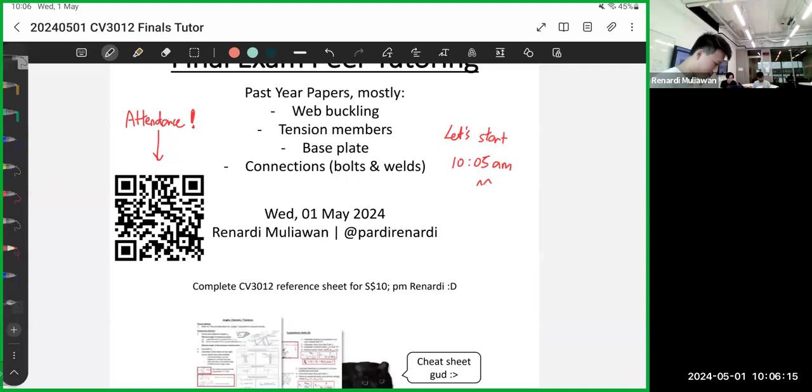Today is the final session of steel, so I'll be covering what we have not covered in the last two sessions: web buckling, tension members, and connections. Base plate, I've heard, is not in sight this year, that's just for info - I'm not sure, that's what people told me. So we'll cover it last if we have time. Let's focus on the three.

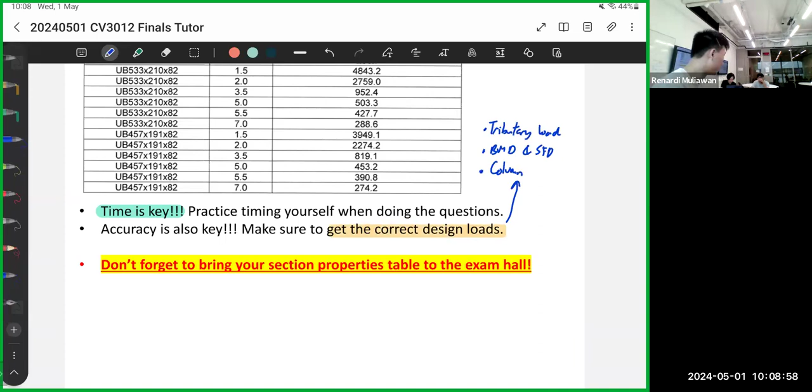Just a bit of recap on quiz two - I think some people made this mistake. Before we start, I'll give a context: for example, you get a moment of 60. Some people divide the 60 into three floors, like 20, 20, 20 - this is wrong. You only divide the 60 between two floors, because the beam is connected to the column above and below only. So if this is 60, 30 will go on the top column, and the bottom column also receives 30. I heard a lot of people divide the 60 by three floors - that's not correct.

So this is under the design loads for the column. Do practice the tributary loading, BMD, SFD, and also the columns.

I'm not sure if this is still applicable for this year because I heard there's a change in prof. Last year they asked us to print the whole section property table, with all the values. I'm not sure if this year they require it, but I prefer to still print it just in case.

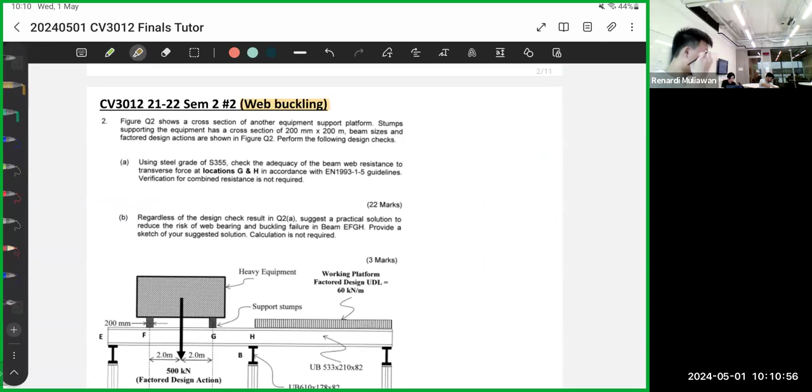For the first question, web buckling - this is what we skipped in the first session because it's not under coverage. For context, this is applicable when there is a concentrated force, a point force. So if you have an I beam, for example, this is your I beam, something like this.

If this is your I-beam, when you put a force on top, like a point force, the web—this middle part—can buckle like this. We consider this a failure. So we need to check for this buckling, to make sure that the beam doesn't buckle when we put some force.

This concentrated or point force can be from the external load, or it can also be from the reaction forces. Both are considered, because technically a reaction force is also a point load, so it's considered under the check.

So here's an example from 2021. Now you have a heavy equipment, and they give you the stumps of the equipment, which is the support, measuring 200 by 200. This one is a typo—it's supposed to be mm. So 200 by 200 means this thing is 200 by 200.

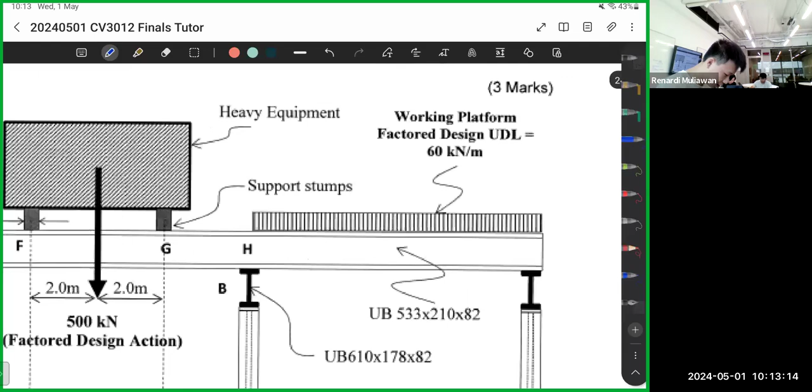So if you see here, at G, the point load comes from the object, from the block, from the heavier equipment. It goes like this. At F there's also a point load, but we only ask to check G. There's also at point H a reaction force going upwards. So these two forces are the ones they ask you to check.

So let's find these two forces first. Your heavy equipment's weight—they give this one already: 500 kilonewtons. It's a factored design action. Keyword here: factored, meaning partial factors have been applied.

Remember, there's the raw loading and there's the processed loading, the one which you have multiplied by the partial factors. If it's factored, it means they have already multiplied for you—you don't need to multiply by 1.35 anymore.

So in this case, we know that FG is just 500 divided by 2, so 250. Because the 500 here is split into 2, right? So F here is 250, and G here is also 250. So we have 250, 250.

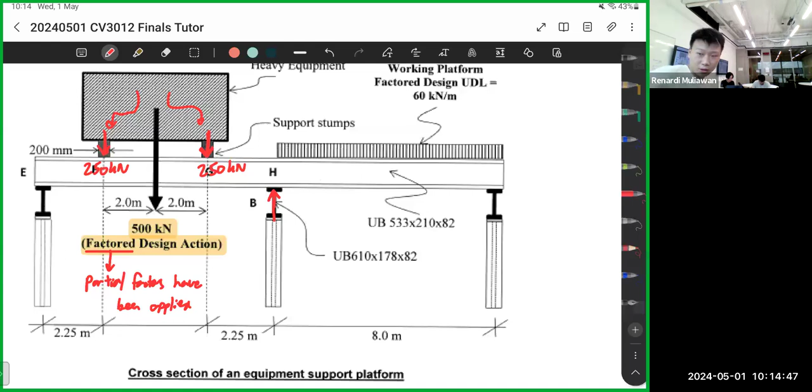Now how about H? If you see here, there are 3 reaction forces—here, here, and here. But usually we assume these two portions are simply supported, so it's easier to analyze. So now assume simply supported.

So therefore FH is 250. Where does that 250 come from? Remember we have 500—this is 500, so this is 250, 250. If you notice, this part of the beam is symmetrical, so 250 here will be carried by FE, and the other 250 will be carried by FH. That's why here is 250. Or you can also just divide the 500 loading by 2, so it's 250.

But if you notice, H also supports this part of the beam—the right side of the beam. So now we have 60 kilonewtons per meter, that's the UDL. This UDL will be split into two as well, into FH and also this part, call it C, for example, so FC.

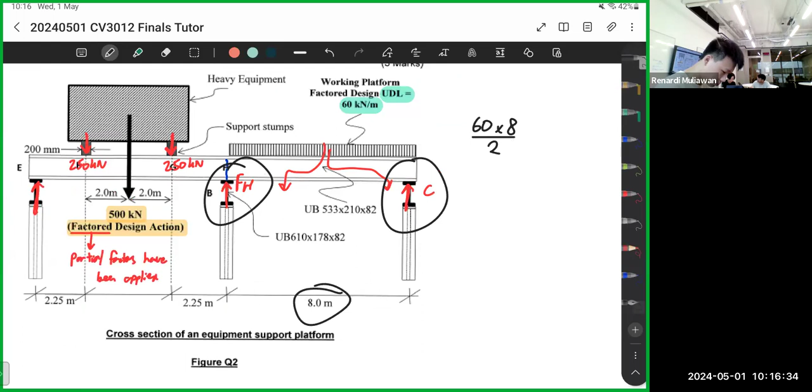So you need to add how much? 60, that's the UDL, multiplied by the length, which is 8, divided by 2, because it's split into C and H. So 60 times 8 divided by 2. Therefore, your FH is 490. So that's your forces.

So now we have FG and FH, right? Then we can do the check. For this check, usually we do it one by one—we do it for one point force first, then the other point force. I'll put something like this. So let's do the check for point G first.

Okay, so for the first step of checking, we need to identify the load type. For web buckling, there are 3 load types: type A, B, and C.

Let's clarify what's type A, B, and C first. Okay, so if this is your beam, this is another beam, this is your beam. This one is in your lecture notes and also in the Eurocode, so you can refer to that. Type A, if this is your force, located in the middle of the beam, that's type A.

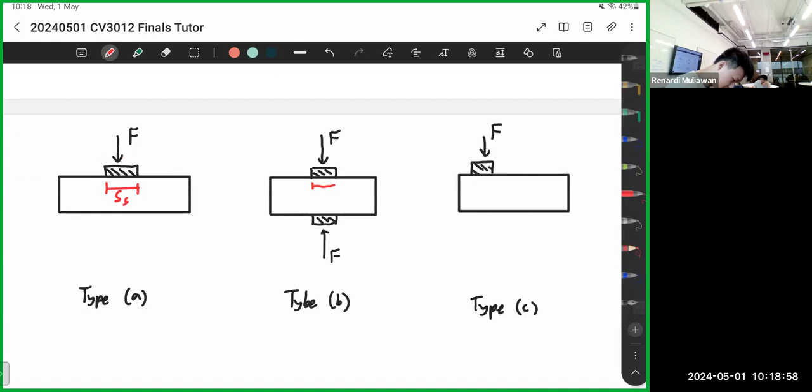Just for info, the force is usually spread on this area. We call this area SS - this one is SS, this one is SS. It's like the bearing location of the force, where the force lies on. Then for type C, we have this also, which is C.

Yeah, so these are just some parameters. This one you can see again in the Eurocode, so you can refer to the Eurocode.

Okay, so if you go back to this example, where's point G? Point G is here, located in the middle of the beam. It's nowhere near the end of the beam, and also it's only one force going down. It's not like if there are 2 forces like this, then it's type B. But since there's only one force from the top like this, we call it type A.

Okay, so like this. This one is FG, so this one is type A. For type A, there's a calculation for KF.

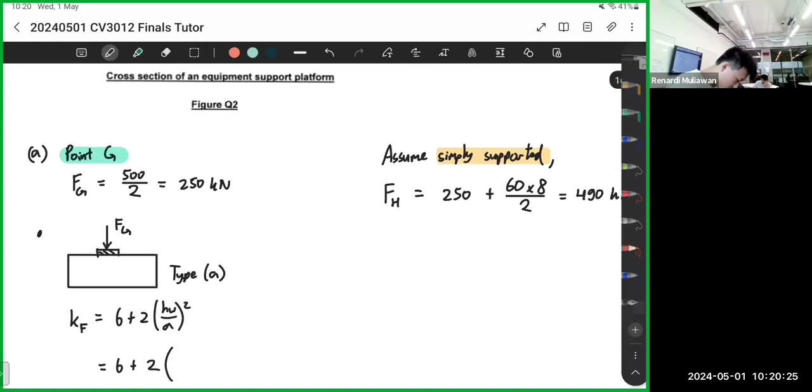KF in this case is 6 plus 2 HW divided by A squared. So in this case, it's 6 plus 2. Then what's HW? We need to refer to the beam first - it's UB 533 210.

Take your section properties table, find universal beam, then go to 533, 210, and 82.

For HW, you can approximate it as H minus 2 times TF, divided by... Just for context, if this is your I-beam, this whole thing is H, this small thing is TF. That's why it's H minus 2TF, so you get your HW.

Okay, so now we have this. A is the distance between stiffeners. So let's go back to this - if you have a stiffener like this, then this is A.

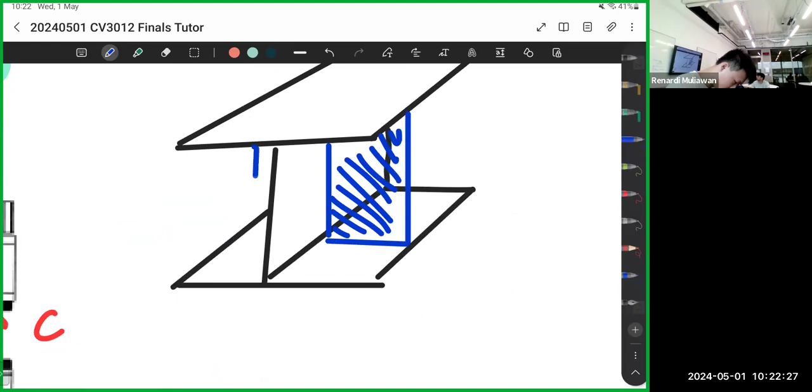They put it like this - they put like a slit there, like a plate in the middle like this. It's to stiffen the web, so that's what a stiffener is. You can see it if you look at a beam in the middle. Later, if you see I-beams in a construction site, you can see those stiffeners.

But anyways, if you see in this image, there are no stiffeners, right? If there are no stiffeners, we put A as infinite. If A is infinite, then this becomes 0, so your KF is just 6. Yeah, okay, that's correct.

So now that's done. Let's go to the next step. So far clear, right? Okay.

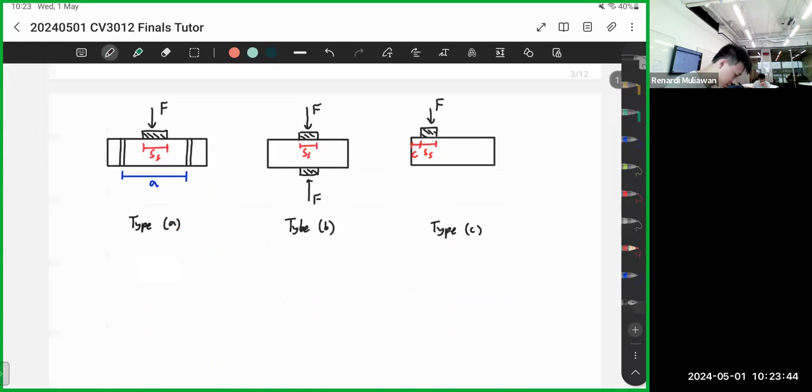Okay, so after finding KF, you can find FCR. This one is just following the steps already. FCR in this case is 0.9 KF times E times TW cube divided by HW.

Again, this one you need your properties table. So KF in this case is 6. E by default is 210,000. This one is in megapascals, so Newton per millimeter squared.

And then your TW here, you need to find it from the table - it's again 533 210 82, which is 9.6. I'm afraid I copied it wrong here. Then HW, as I explained before, is just H minus 2TF, so 528.3 minus 2TF, where TF in this case is 13.2.

Okay, so this one is in newtons, because this one is millimeters cubed divided by millimeters. So if you want to change it to kilonewtons, you just divide this by 1000, then you get kilonewtons.

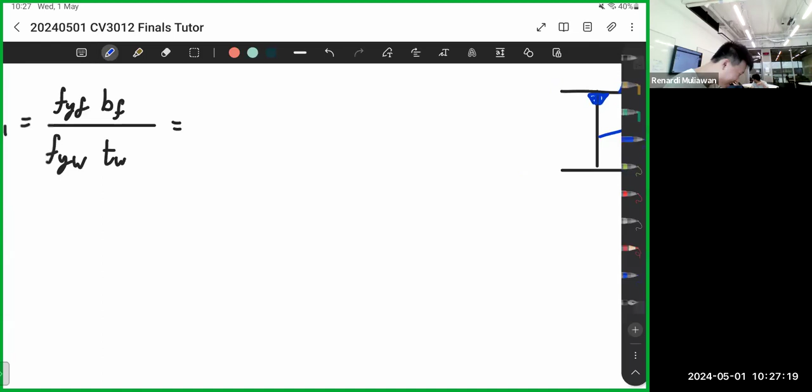Okay, but in this case, right, since the whole beam is, I think S275 - oh sorry, S355. Yeah, the whole beam is S355. So both the flange and the web, they are of grade S355. So this one can cancel out because they are the same grade.

It's for this case, yes, it's usually the same because hot rolled it's one piece. But yeah, this formula is just for the case if you have three different plates, you put it together as one beam, because that's common also.

Okay, but for your case, it's mostly hot rolled, so usually it's the same. Okay, so this one because it's S355, this one is also S355. Okay, so now we just find BF. So BF is your B, that's 208.8

divided by TW. So TW is 9.6. That's your M1. Then M2. M2 is 0.02 HW divided by TF squared. I keep forgetting the square for this stuff for some reason.

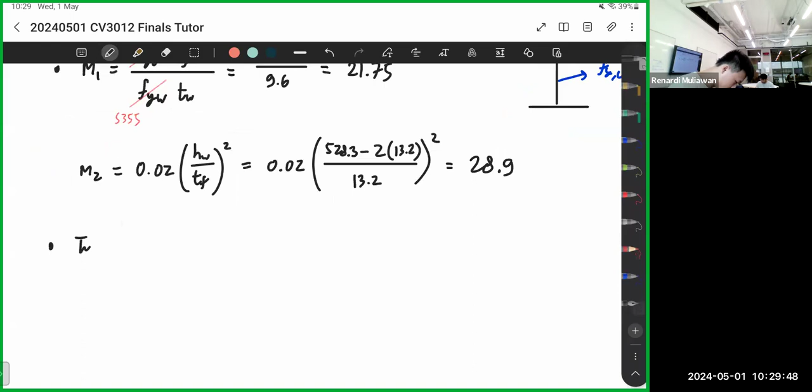And then for type A and B, you follow these steps. So Ly - before that, find Ly. I write here type A and B, right? Because both type A and B, they use these steps. For type C, they have another step.

Okay, for type C, I think you need to calculate LE first. LE equals something, something, something. Then just follow the steps. Okay, but since ours is type A, let's follow these steps.

So Ly is equal to SS plus 2TF. Then you have 1 plus square root of M1 plus M2. Okay, so let's focus on SS first.

So just as I drew just now, SS is the bearing of the force. It's where the force is located. Okay, so for this one, for point G, you need to look at where the force is at. Okay, so if you notice, for the force G, the bearing plate or the bearing surface is this.

Okay, is that surface. Okay, so we know from the info, this one is 200, right? Okay, like this plate is 200, this bearing force, this one from here, 200mm by 200mm. So your SS is 200.

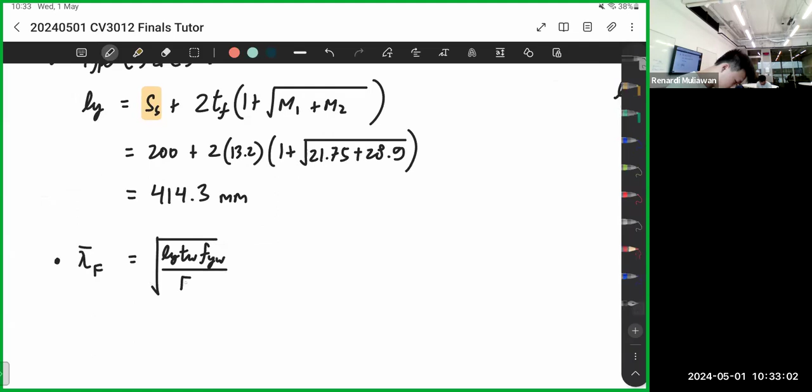So Ly TW FYW divided by FCR. And this should be bigger than 0.5. So Ly in this case is 414.3. TW, I think it's 9 point something. 9.6, yeah, thanks. 9.6.

Then FYW, just now it's grade 355, right? 355 divided by FCR. So FCR in this case was 1999, or 2000. Okay, this one we convert to SI units, so times 10 to the power of 3. Okay, so 414.3. Okay, thanks. 0.84.

Okay, so it's bigger than 0.5, so it's okay. If it's lower than 0.5, use 0.5. Okay, so this is like a minimum value. Okay, so now we have this. Okay, so the rest of the steps is straightforward. We make a new page.

Okay, so after lambda f, you need to find chi f. So chi f is 0.5 divided by lambda f. Okay, so it's just 0.5 divided by 0.84. So in this case, you have 0.595. So this is your reduction factor.

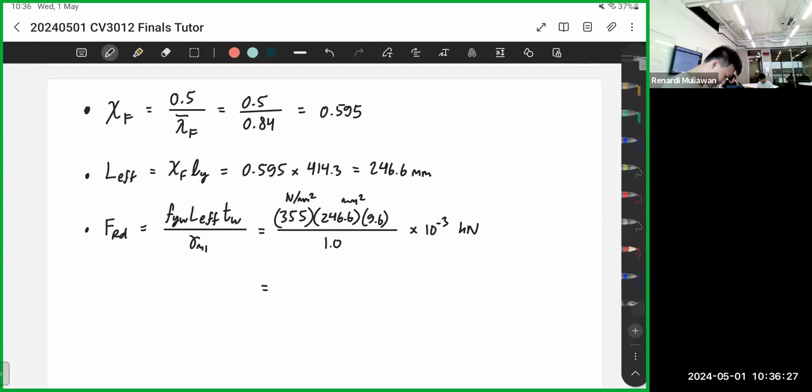FYW is 355, L effective is 246.6, then TW is 9.6, all divided by gamma M1, which is 1. Okay, this one is Newton per millimeter square. This one is millimeter square. So you just times 10 negative 3. You get kilo newtons. So 840.4 kilonewtons. Okay, so now we have this.

Okay, so now we have two checks. Okay, so first thing is eta 2. Okay, eta 2 first. So this one is FED divided by FRD. FED in this case is 250. 250 divided by 840.4. So this case is 0.297. So this one must be less than 1, so it's okay.

Okay, then for the second check, I think it's eta 1. So eta 1 in this case is, oh, this one is in combination for your moment. MED divided by FYW PL divided by gamma M1, gamma M0.

Okay, since this one, right, we don't have time, usually you can stop at this step, okay. But by right, you need to find the moment at that place. So if you have time, find the moment. If you don't have time, just leave it like that. But the final check should be this one: eta 2 plus 0.8 eta 1. So this one should be less than 1.4. So this one is the combined check.

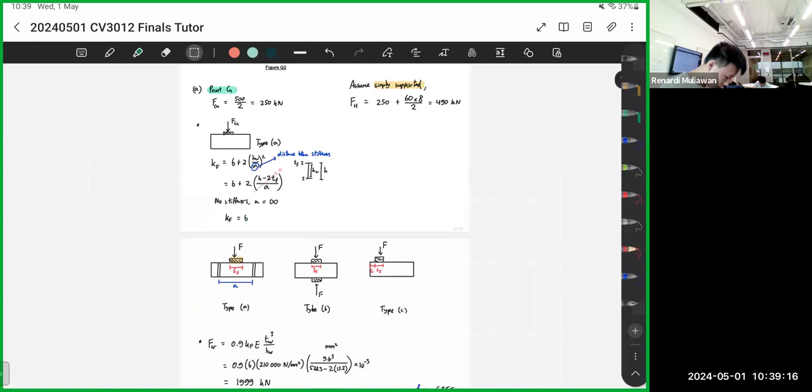So let's go to the second point, which is point H. So for point H, so the steps are exactly the same, right? Let me see. Okay, so if you see point G and point H, both of them are type A because it's in the middle of the beam. Okay, it's nowhere near the end of the beam. Oh wait, let me turn off the notification for this one first.

Okay, now let's continue first. So yeah, so again, FH is located in the middle of the beam, right? So FH is type A. Then for type A, the calculations are the same. So KF is the same for FH. FCR is also the same because there's nothing changing here. M1 and M2 is the same. So everything is the same until this part, the L1.

Okay, so I'll write it down first. Everything the same up to L1. Okay. Did I forget something? I think I forgot something. Ah, yeah, sorry, I forgot something. It's this one. Sorry, I got mistake. Okay, it's a mistake in the explanation. Okay, if this is lower than 0.5, if lambda f is lower than 0.5, you set M2 to be 0, then repeat steps. Yeah, repeat from Ly.

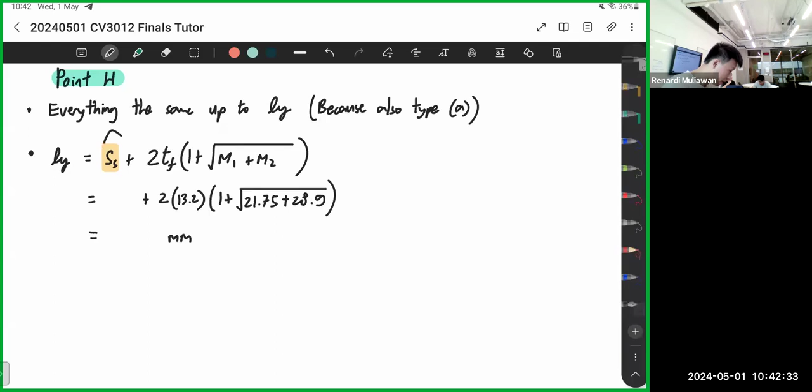Okay, so for Ly, right? TF is the same, M1 is the same, M2 is the same. But what's SS? Remember, SS is your bearing width.

If you go back to the image, FH, the bearing width is this I beam. So for I beams, there are special calculations to calculate the bearing width, like this SS. There's a special calculation for it.

So for this SS, as you can see, the force is transferred from this U beam. So the U beam you calculate for SS is this. Use this for SS. It's not this beam.

This beam is the beam that we're checking. The beam we're checking means all the formulas here - HW, TF, TW - it uses this beam, the beam that we check.

It's only for SS. So only for SS we use this one, the transfer beam. So this one is only for SS, because SS has nothing to do with the beam we're checking. It has to do with the bearing width, that's why we use this one for the SS.

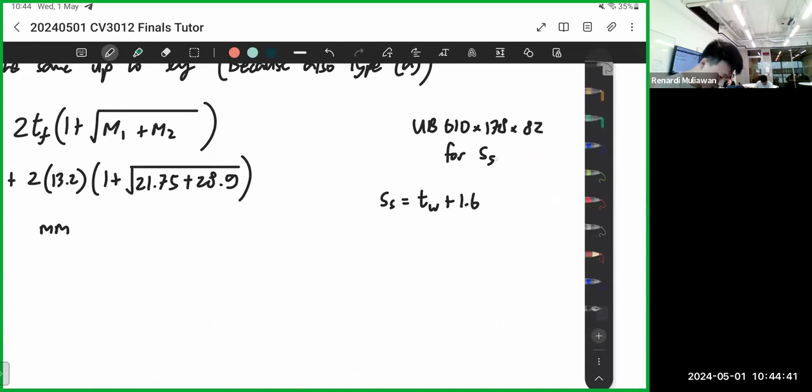So let me type it down. SS in this case uses UB 610 x 178 x 82 for SS. Let me cut and paste. So for an I beam, the SS is TW plus 1.6R plus 2TF.

So this one again, you refer to this beam for SS. So TW in this case, use your table - go to 610, 610 178 82. So TF is 12.8. Sorry, TW is 10. TW is 10 plus 1.6 times R.

So R in this case is 12.7, plus 2 times TF, in this case 12.8. Yeah, this one you can practice looking from the table.

So, what's SS? So 10 plus 1.6 times 12.7, plus 2 times 12.8. In the end, we will get 55.92 millimeters.

So this one just copy paste, put it in SS. So in the end you will get 55.92 plus 2, 13.2, so you have 270.2. Okay, so now you have this.

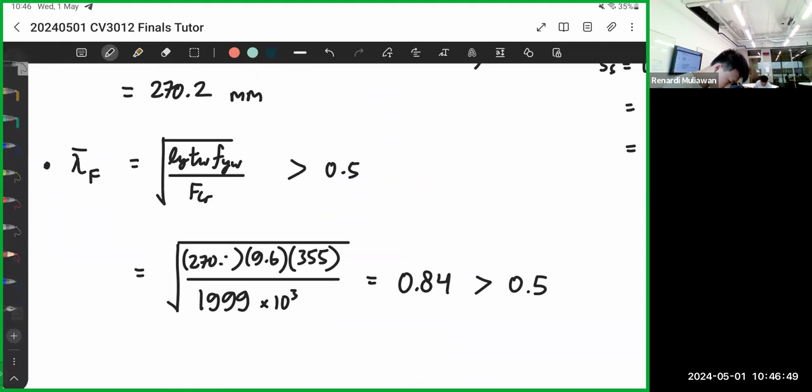Then TW stays, because TW is not this beam, it's the beam that we checked. That's why TW stays. So in this case, we have 270.2 times 9.6 times 355, divided by 1999. We get 0.679. So quite close to 0.5, but still above, so it's okay.

So we continue the next step. Yeah, these steps are the same, but change this one to 0.679. So we use that value for this. And this one changes, LY changes also.

Leff changes, TW stays the same. FRd changes, FPT changes. So just fill in the values. So 0.5 divided by 0.679, we get 0.736. So 0.736 times LY.

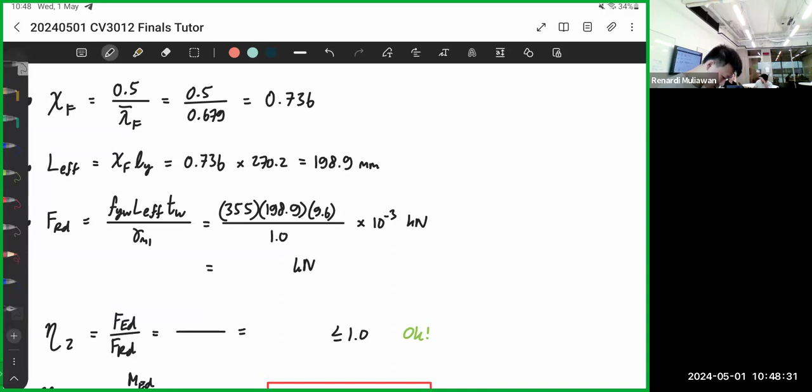Remember LY changes to 270.2. So you get 198.9. So Leff equals 198.9. 355 times 198.9, 9.6 divided by 1000, you will get 677.9.

So 677.9. FED for this case is 490. So 490 divided by that answer, you will get 0.723. So it's lower than 1, it's okay.

Then, as usual, you need to do this check. But we don't know the moment, right? Actually, for this one, we know, because it's at the support, and we assume it's simply supported. So M is 0. So in this case, we know this one is 0, because MED is 0.

So your combined check, in this case, is just 0.723 plus 0.8 times 0, which is just the same, 0.723. This is definitely less than 1.4, so okay, done. Let me move to this.

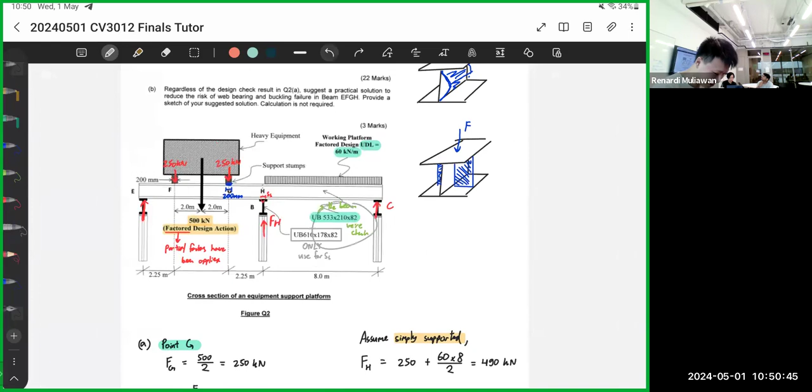And actually that's part B also. So regardless of the design check, suggest a practical solution to reduce the risks of web bearing and buckling. So actually the answer is here, I've drawn it already: add stiffeners, that's it. Add stiffeners.

Because this will stiffen the web so it doesn't buckle as easily. Okay, so this one is part B. Let's label this part B. So done, that's the whole thing. Are there any questions so far for this?

Okay, for the, you can see other examples in the CE Club solution. Yeah, because I think the year after this they have Type C, so you can try Type C as well. Okay, yeah, but the steps are mostly the same. So yeah, it's okay, just they have only like one more step, I think, like to find LE. Yeah, just to find LE. Okay, so that's number 2 of the exam done.

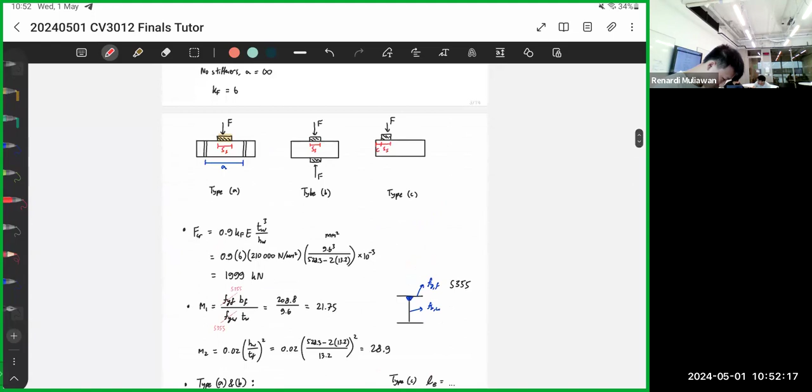Wait, I'm not sure how you determine the cases. Again, case A is for the force which is in the middle of the beam. Then type C is for the force in the end of the beam. Type B is if there are two forces on top and bottom.

Okay, so for this one, again, I'll explain. Type A is located in the middle of the beam, like you see the right and left, right, it's very far from the end. Then you see point H, you see the left and the right, it's also very far from the end. So both of them are type A. It doesn't need to be strictly at the middle, as long as it's relatively far from the end.

Yeah, so I'll just draw examples for type C and type B like this. Okay, so for example, we have something like this. We have this. We have this. I'll give you an example like this, for example.

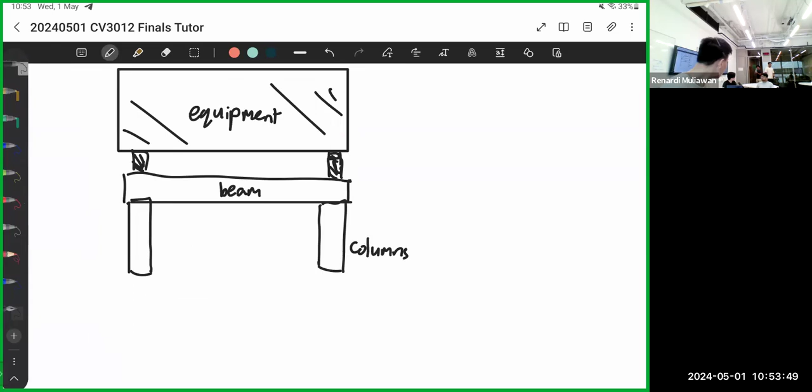Okay, so for this one, right, you can see here, if, for example, this equipment, then this is your beam, then these are your columns. Okay, so if you have something like this, right, there's a force going from the top, from the stump of the equipment. There's also a reaction force going from the bottom. So this is type B. Okay, even though it's located at the edge, right, type B is usually more critical. Okay, so this is type B.

Another example, for example, is if you have something like this, this is your beam. For example, you have some loading here. This is your W, which is a UDL. Then this is your support, for example like this, so this one is column. So this one, you have a reaction here, right? So this is the force. Okay, so this is type C because there's only point force going from one direction. Okay, so this is type C.

So if you notice, this one, the UDL, so this UDL is not considered, it's not considered under the web buckling check. Okay, why is it not considered? Because it's distributed, it's not a concentrated force. Okay, so only concentrated force matters. Okay, I hope this clears up the type A, type B, type C.

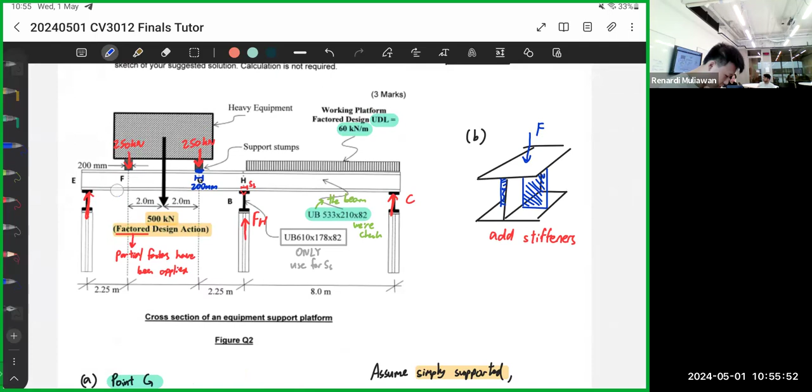Okay, so wait, somebody asked, can you consider F type C? No, F is not type C. F is type A. Again, you need to look to the left and to the right. Okay, F, right, there's nothing to the left and to the right, so it's type A. This one, point E, this one is definitely type C, because it's located at the end of the beam. Okay, this one is still type A.

Sorry, um, this one, this one is type A. The UDL on top doesn't matter. Yeah, UDL is not considered a point force, so it's not type B. Okay, so again, FH, even though there's a UDL on top, UDL is not considered a point force. Okay, so there's only one point force going from one side. Okay, so FH is type A.

This one is type C, not type B. Remember, UDL is not counted. Okay, so I hope this clears up type A, B, C. Okay.

I think that's everything for web buckling, so we can go to the next topic.

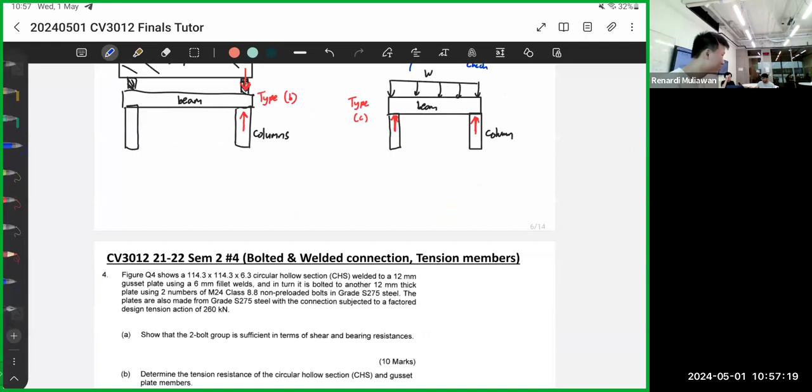Okay. Okay. So I'll pause the recording as well. Okay. Wait, let me see. We have this.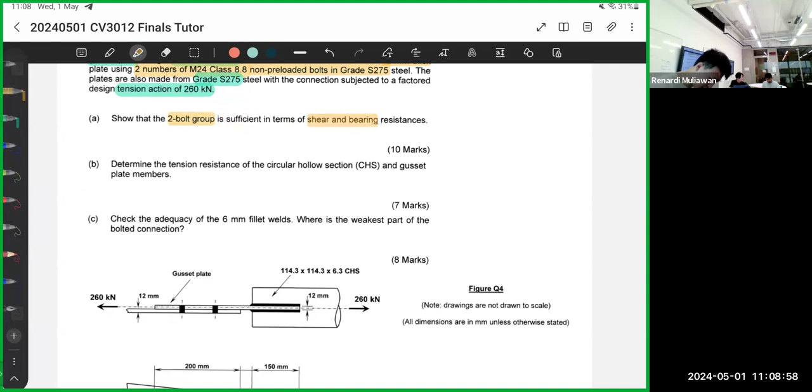Usually we look at the details of the members first. They're asking about the bolt, the two bolt group, so it means we're looking at this. And then we have what we call the shear and bearing resistance.

Shear first, right? Shear means you slide the thing. So if you have an object like a bolt, shear means you have one force going here, the other force going there, so it will slice through the thing. This is your shear failure - the thing slides. This one is F, this one is F.

That's visible from here, this is your plan view, so it fits like this. It is part A. It also says bearing resistance.

So what's bearing resistance? If you have a bolt like this and you have a plate going this way - this is your plate. Let me draw it in 3D so I can visualize it to you. Imagine this is your plate, this is your bolt.

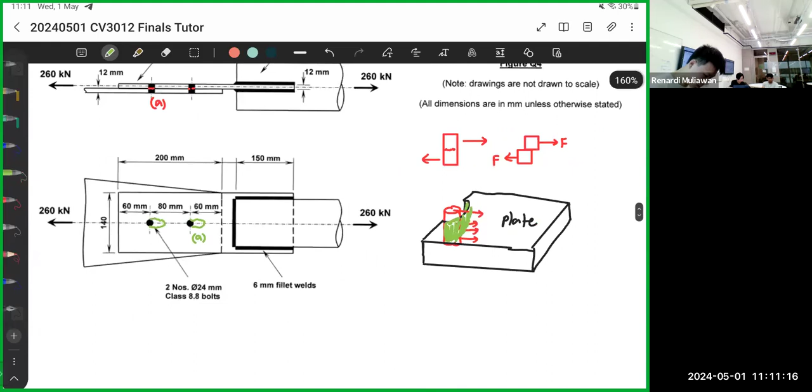This is part A. So this one is shear, this one is bearing. Usually bolts only have these two: shear and bearing.

Let's do the shear check first. So shear check: you have M24, class 8.8, S275 - this is your bolt.

For this one, for bolts, usually we go directly to the table. There's a calculation way and there's also the table way, but for S275 bolts we can go to the section properties table. Go to the bolt section, go to non-preloaded bolt, and you will find the FvRd. From the table you can obtain FvRd - V stands for shear, Rd is just design resistance.

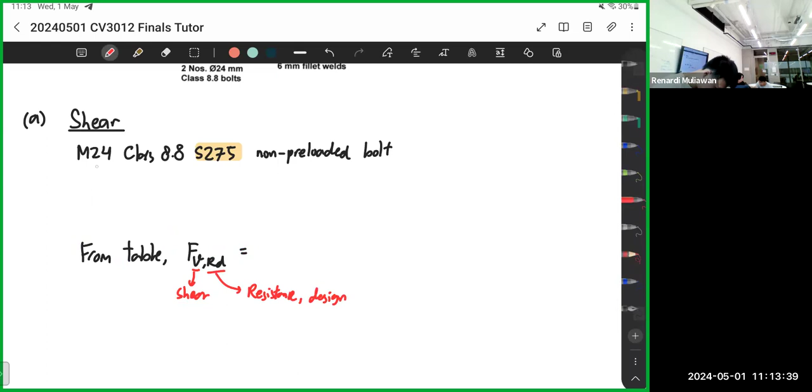Go to your table, open class 8.8 non-preloaded. Practice yourself looking at the table. M24 - 24 is the diameter of the bolt. So your FvRd, you should get 136 kilonewtons. This one is based on the table.

Okay, then we see how many bolts do you have. We just directly use the table, we don't need to calculate. Okay, we can calculate, but that takes more time. So let me see.

Yeah, this one is the calculation. Okay, I'll do both. So you can do this, or you can do FVRD equals to alpha V FUB A divided by gamma M2. So it's a bit longer, right?

That's why usually I just do table. So this one is alpha V is 0.6. FUB in this case is 800. Then A is area of the bolt, so 24, pi over 4, 24 squared. Then all divided by gamma M2, which is 1.25. So this should give you a similar answer.

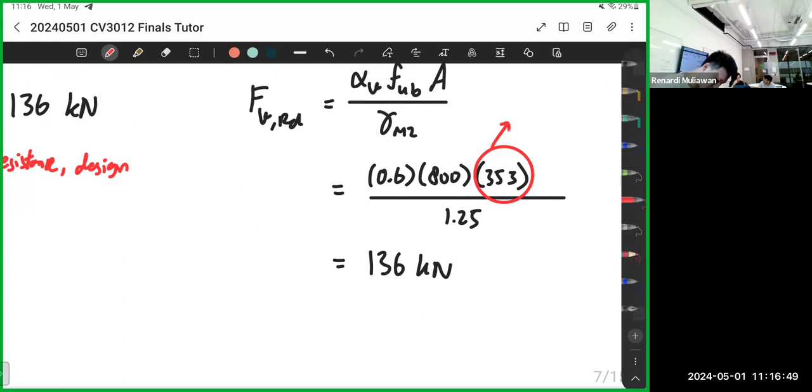Oh yeah, use a tensile stress area. So this one is 353. Let me see, is it the same? Yeah, you get 136 or something. Yeah, so this one also use table. Okay, it's not 20, it's not 24 apparently. So A use table.

So either way, you need to use the table. So you can just take FVRD directly, because either way, you need to take A from the table also. So these two ways you can do, but usually I'll take FVRD directly. Single shear and double shear, I think it's easier to see later in the second example.

Okay, let's continue. So now we need to consider two things. One, is it single or double shear? I'll just explain how single or double shear. Two, how many bolts are there? These two, okay? So these two things you need to consider.

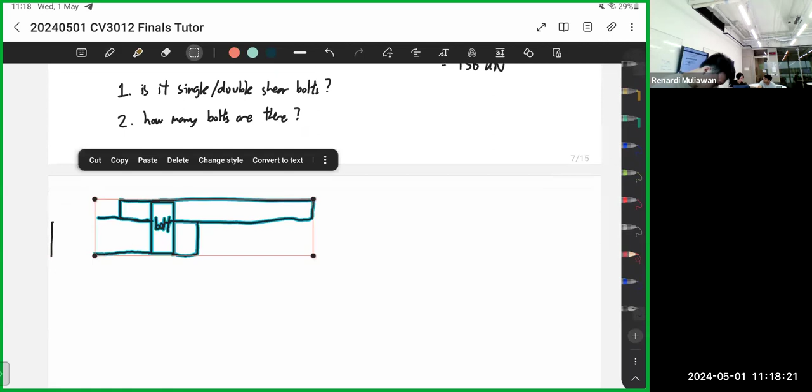So for single shear or double shear, you must look at the bolt cross section. How many shearing planes are there? So if this is your bolt, if this is your plate, for example, like this, for example like this, okay, basically you need to see where the bolt fails.

You need to see where the bolt fails in the shear. So for this image, it only fails... wait, let me make it nice, let's make this blue so it's obvious. Okay, something like this, this is bolt, this is plate one, this one is plate two for example. You must see the cross section, where does it fail? In this case it fails only in this one line. So if it only fails in this one line, it's a single shear.

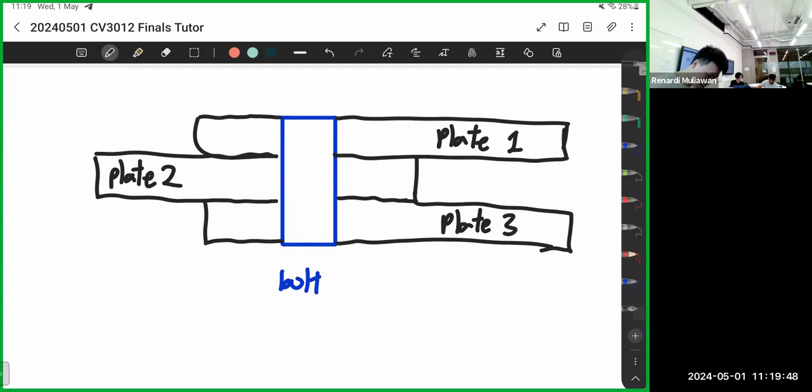Okay, in the case that we have something like this, for example you have a bolt now like this, now imagine your cross section looks like this, then you have this, yeah the plates, then you have like this. So this one is plate one, plate two, plate three. Yeah so now if you see, sometimes they are not plates, they can be gusset plates, they can be like pin connections. So there are a lot of cases.

The key here is just to look at the elevation view, look at the plan view, you see where does the bolt fail in shear, you count the number of shearing planes. This one you put it this way, this one you put it this way, well for this one you put it this way, this one you put it like this.

Okay, so ignore the F, the F you can ignore actually. What I want you to focus is actually on this side. If you pull it like this, the bolt will shear here, it will shear here, it will fail in these two positions. Then this is a double shear bolt because they have two locations for failure.

Okay, so if we go back to the image just now, for example this image, you see the elevation. There's one plate going that way, one plate going this way, so the shear failure plane is here. For this bolt it's the same here. So these two bolts are single shear bolts.

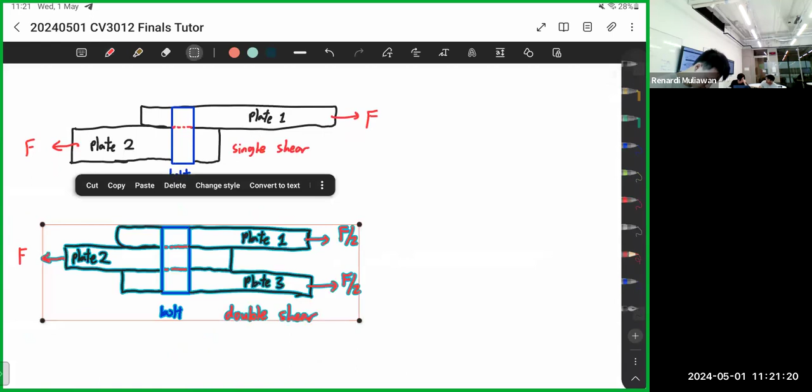So total resistance, total shear resistance in this case is, so two bolts times one because it's single shear times the FVRD. So this one is the number of bolts, this one is single shear, this one is just your shear resistance per bolt.

So from the table, they only give us FVRD, this one is per bolt. So one bolt resists this much force, if you have two bolts then it resists twice the force. So this is just 2 times 1 times your FVRD, which is 136. You will get 272. This one is bigger than your 260, right? Okay so bigger than VED, which is 260. So this one is okay.

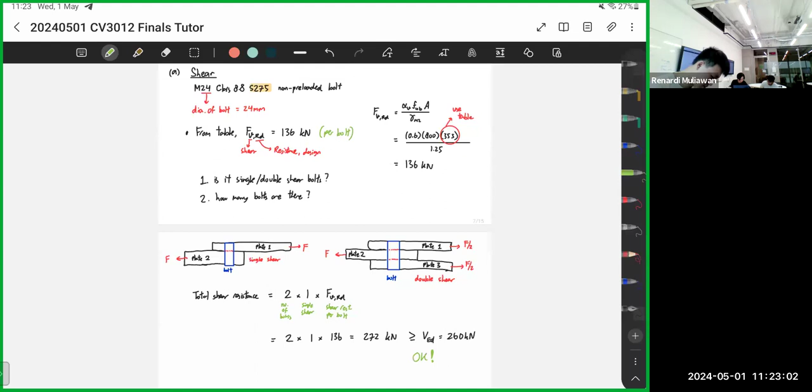Next is bearing resistance. For bearing, this is up to your preference, but I don't like to use the table for it, only for shear. Because if you look at the table for bearing, it's a bit hard to read - thickness of ply, edge distance, end distance, pitch, gauge. I'd rather just calculate manually for this case.

So there are some steps. Step one is to find FUB divided by FU. FU here stands for the ultimate - wait, there's yield strength and ultimate. I think ultimate stress, so ultimate stress.

So B here stands for bolt. This means the FU here is the property of the plate - this one is of the plate, this one is the property of the bolt. So be careful.

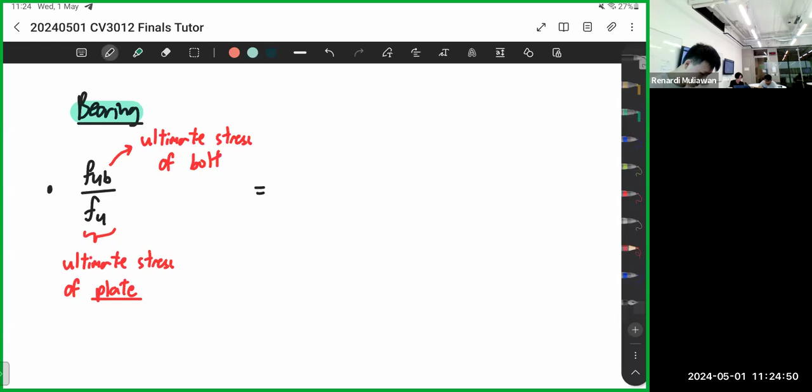Okay, like that. So because if you go back to the definition, the bolt is pushing against the plate, that's why you need to compare the strength of both the bolt and the plate. If the bolt is stronger than the plate, then it's a bit risky. That's why we need to take this ratio.

But in this question, it's just nice - I think both are S275, right? So S275, FY is 275, but FU you need to check the table, yeah, check the table. This one you will get 430.

See? This is the same table where you get the FY. You can check, okay? I don't know if you can see, but it's this table. Okay, this table, you can see this table. Yeah, this one - so that's where you get the FU.

So this one is 430 divided by 430, so it's just 1. Because both the bolt and the plate have the same grade.

Wait, really? Oh, wait a second. Oh yeah, you're right, you're right. Oh, oops. Oh man, this FUB is 800. Sorry. Oh, okay, wow, that's dangerous. Okay, so apparently FUB and FU is not from the same table.

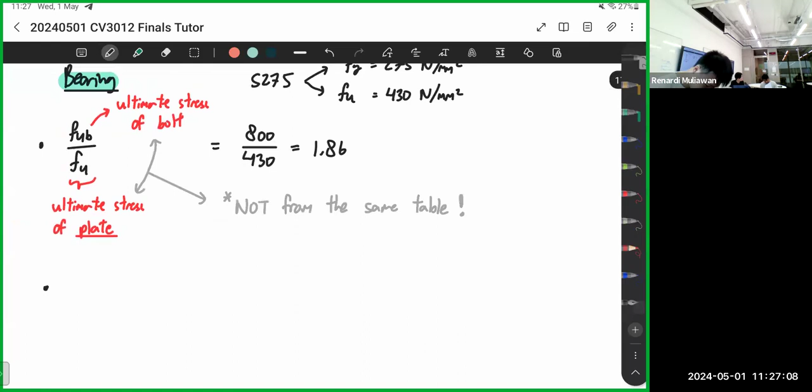Okay, thanks for the seat. This one I forgot already. Okay, so now you have FUB and FU, so now you calculate the alpha D.

So this one we go back to the end and edge distances and those things. So I'll clarify first - if you have a group of bolts, then this is your force. We have two criteria: we need to check the bolts parallel to the force and perpendicular to the force.

Let's start with the parallel first. For parallel, these ones are the end bolts - yeah, these guys are the end bolts. The rest, so these guys are the inner bolts. Okay, this is for the direction parallel to the force.

For the direction perpendicular to the force, we also have a set of inner and edge bolts. So these guys are the edge bolts, and these guys are the inner bolts.

Okay, so we can have inner bolts, we can have inner and edge. So we have inner-edge, and inner, or end-and-edge. So we have 4 combinations, depending on where the bolt is. There are 4 combinations.

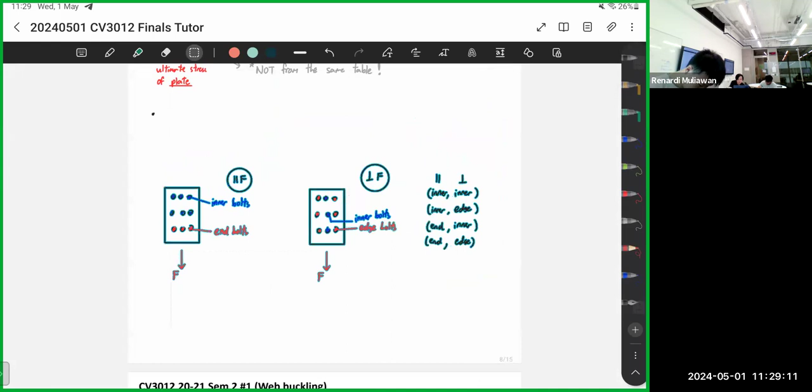So if you look at this image again, for this bolt, it's the end-edge. This bolt is inner-edge, okay, because it's located at the end of the member. So this is your plate, right? You see this one is located at the end, this one is inner, because this is at the end of the member. Okay, this one is the end, this one is the inner.

And then perpendicular to the force, so we're looking at this direction, looking at this direction. Both of these are at the edge. So take your time to look at the image. But now we have one end, one edge, one inner, one edge.

Okay, so parallel - let's do parallel first. So parallel to the force, for end bolts, so alpha d - so we have end here, inner.

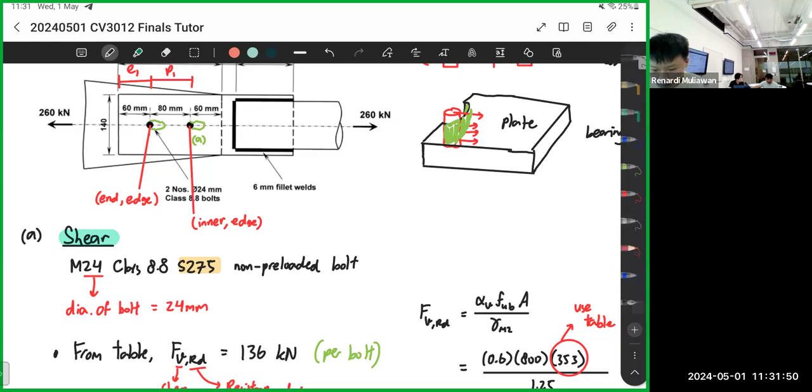And I forgot to clarify one more thing. This 24, wait, where is it at? Yeah, this 24 is the diameter of the bolt. Okay, for the diameter of the hole, okay, did I write it? I think I wrote it somewhere, but yeah, there, okay.

So for bolt diameter, okay, bolt diameter is labeled as D. Hole diameter is labeled as DO. If your bolt diameter is less than 24 mm, DO is D plus 2 mm. If it's bigger than 24, DO equals D plus 3.

Okay, there's also a third category of bolts. It's called the holding down bolts. This one I think is very rare, like in our case, holding down bolts. This one is DO equals D plus 6. This one is in mm, mm, mm.

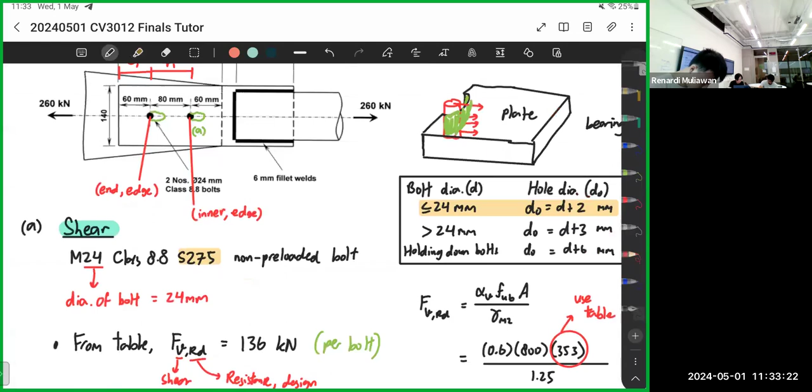So in this case, since our bolt diameter is 24, we use this one. DO equals D plus 2. That's our bolt diameter. So in this case, E1, what's E1? Let me see E1. E1 is 60. P1 is 80. So 60, 80, 60.

This one is 60. This one is 80 divided by 3 times 24 plus 2. Okay, so we use 26. This one also we use 26. So this one minus 1/4.

Okay, so we have 60 divided by 3 times 26. So this one is 0.769. Then we have 0.776. It is for the parallel direction.

Now we have the perpendicular direction. Perpendicular direction, we are only interested in edge bolts. So we just need to find the edge ones, the edge cases. So for edge cases, k1 is the minimum of, okay, let's find 2.8 first.

So 2.8 times E2 divided by DO minus 1.7. So in this case, it's 2.8. What's E2? Let's go back to the picture. So E2 in this case is this distance. So it's 70 mm. So 70 divided by 26 minus 1.7. So in this case is 2.8 times 70 divided by 26 minus 1.7, equals 5.84.

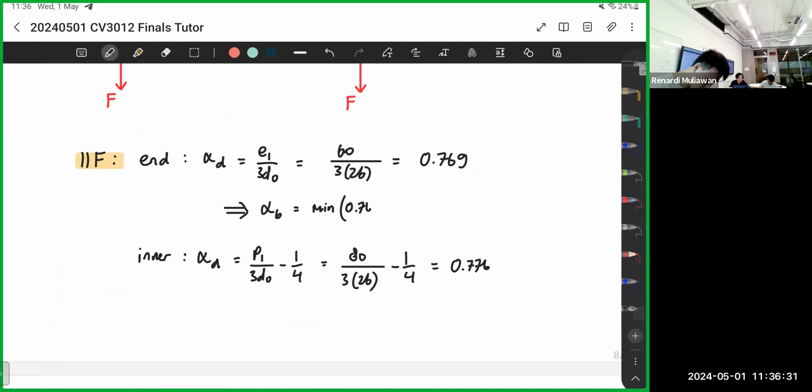Then alpha B is supposed to be the minimum of those things. So alpha B is the minimum of alpha D, which is this 0.769, FUB over FU, which is 1.86, or 1. So in this case, the minimum is 0.769. So we use this value for alpha B.

It's the same with the inner bolts. So for inner bolts, we use 776. Okay, so that's alpha B. So now we have this. We have alpha B, we have K1. Now we can find FBRD.

So now let's find FBRD. FBRD is the sum of the FBRD, basically, of each bolt. So FBRD of bolt 1 plus FBRD of bolt 2. Just now we identified bolt 1 as end edge. Just now we identified bolt 2 as inner edge. So in this case, the formula for FBRD is K1 alpha B, FU D times T divided by gamma M2.

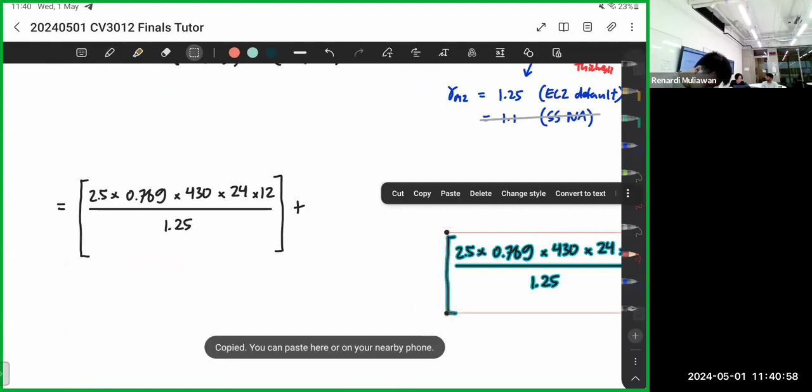So this one is FBRD1. So we find FBRD2. In this case the K1 is still 2.5, but the alpha B we use 0.776. The FU is the same, D is the same, T is the same. So we're done, we just need to find the value.

So in this case we get 383 kilonewtons. This one is bigger than your FBRD, which is 200 and something, right? 260. So it's okay. Done, both checks done. So what's next?

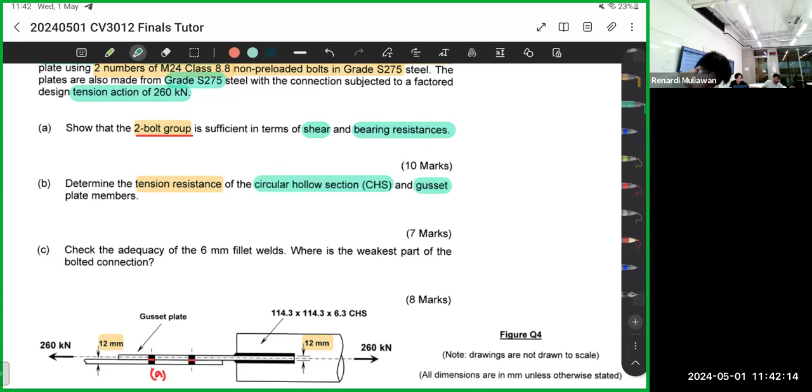Let's see, determine the tension resistance of the CHS and the gusset plate. So what does this mean? The CHS, instead of failing at the bolt, can also fail when we pull a member very hard. It can fail like this. So you break the CHS apart. That's possible, okay, so this is part B.

You can also break the plate apart. So the plate rips, okay, so it's here. If you see the plan view it looks like this, or this. Okay, so you pull the member so hard to the point that it breaks. Actually this one is more like this. It fails usually at the bolt, because the bolt will drill a hole.

Okay, part B. So for part B, it's the tension resistance of the CHS. Let me see, tension members. Okay, let's start with the CHS, we compare it to the plate.

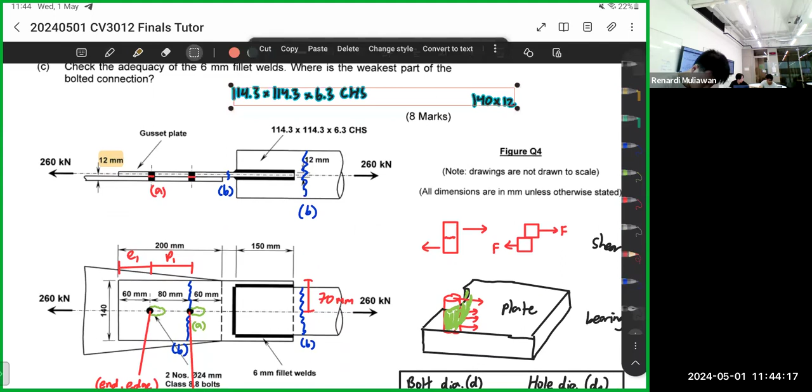The CHS member size is 114.3 times 6.3. Then the plate, the thickness of the plate is 12 times 140. Okay, some people might be confused on the dimensions.

So to clarify: this is your CHS. You're pulling it this way, right? So the area which is in tension is this area, it is the area you're trying to find. For the plate, your plate looks like this. Then remember, you also have two bolts in the middle, you drill some holes into it, right? So there's a hole here, there's a hole there.

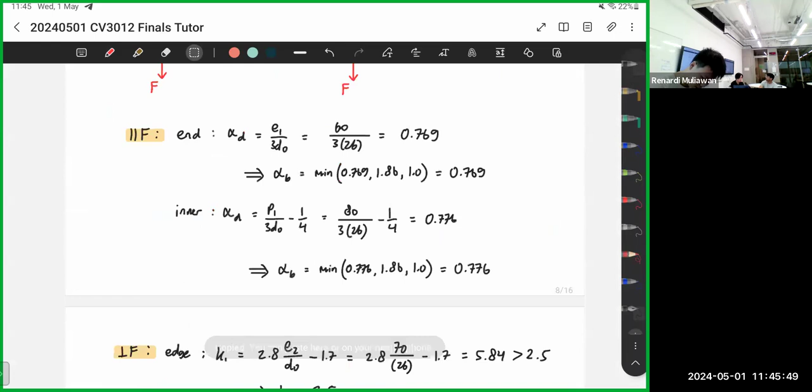Something like that, so you have like this. Okay, in the exam you don't need to draw this nice line, I'm just trying to show you. So the area in tension, since your force is going this way, your area is this, this is what we call A net. Again, if we compare it to the image from the top... copy, paste.

Try to imagine this being this, okay? So this is 260, and this is your plate. You see the plate breaks here at the bolt, I hope you can try to imagine this. So the area is the one in contact at that point, you can think of it that way. So 140 comes from here, 12 comes from the thickness. So this is 12, and this is 140. Okay, let's go back down. So this one is 140 times 12.

Okay, so this one, right? The formula is just, the first step is always to find the A net. This one, you see the A net is just the area of the CHS.

Because there are no holes in the CHS, it's just the area of the CHS, which we look at in the cross-section table. Go to the top row, CHS, hot finished, you find 114.3, thickness 6.3, you will get area of 21.4 centimeter squared.

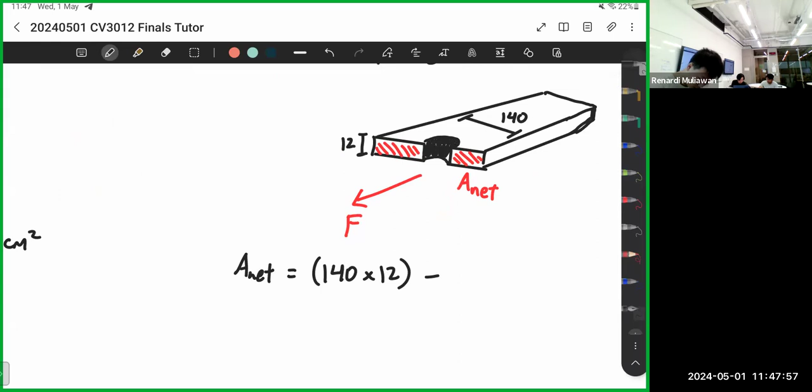For this one, A net is the area of the section, which is 12 times 140. You minus it with the area here, which is got by the bolt. So what's the area there? You find the diameter of the bolt, which is 26, times the thickness, which is 12. That's it.

This one is D0, it's the area of the hole, yeah? It's not the area of the bolt. So plus 2, so 26. In the end, you will get A net equals 1368 mm squared. For this one is times 100.

This one I take from the table. You can try.

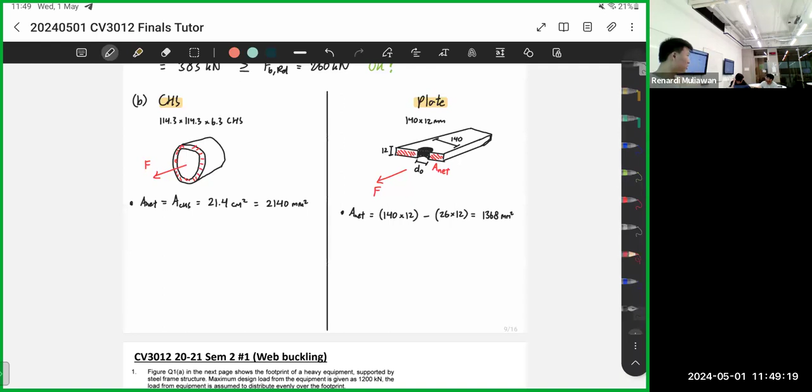Now, find the design resistance. I think they shorten it in the lecture notes, but I'll do it the proper way.

So you need to find NplRd, which is A times Fy divided by gamma M0. So A is 2140, then Fy in this case is 275. Is it 275? Yeah, grade 275. Okay, so 275.

275 divided by gamma M0, which is 1.0. Then this one is in newtons, so I'll make it kilonewtons by multiplying by 10⁻3. So you have 2140 times 275 divided by 1000. So 589 kilonewtons. That's your NplRd.

Okay, then you need to find your NuRd. I think in the lecture notes they just skip to this, because typically NuRd is smaller. That's why I think in the lecture notes they remove this part, but I'll keep it because that was in last year's lecture notes, so I'll just keep it.

This one is just 0.9 times net area. So net area here is 2140, times Fu. Fu is 430, divided by gamma M2, so 1.25. Oh, I forgot to write the formula. Write the formula down: 0.9 A net Fu divided by gamma M2.

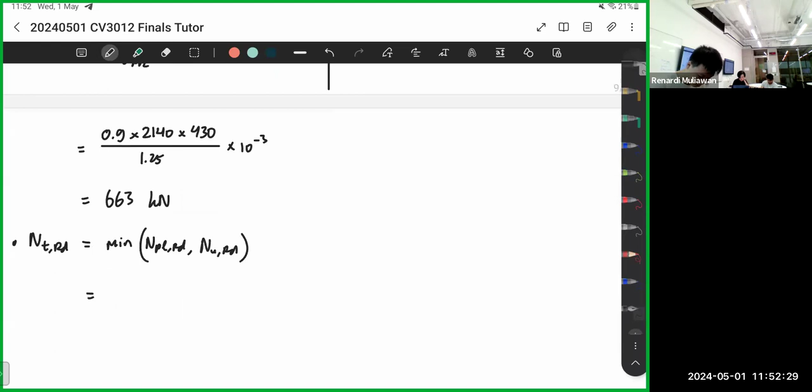So the tension resistance is actually the smaller of the two, because NtRd is the smaller of NplRd and NuRd. So in this case, you will choose 589. Yes, so that's your tension resistance of the CHS.

Okay, so now that's done. Just compare it with the tension force. So tension force is 260, so it's bigger, right? Bigger than 260. So the check passes.

So for the plate, it's the same exact steps. Find NplRd, find NuRd. But here we use A, right? So A is 140 times 12. We don't use A net for this one. So 140 times 12 times 275, then divide by 1,000, you will get 462.

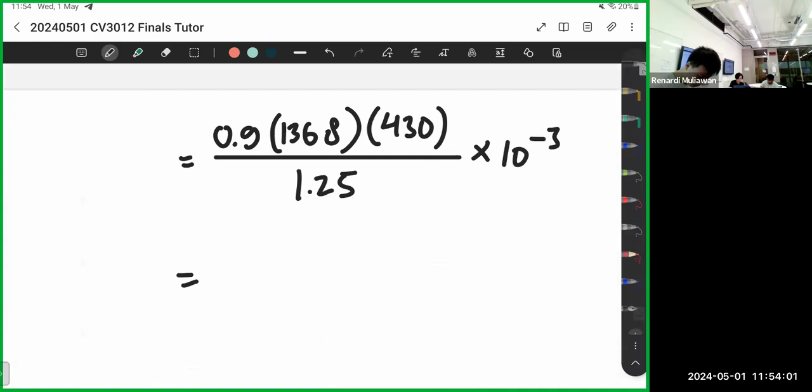For this one, we use A net, so 0.9 times A net, which is 1368, times 430 divided by gamma M2 1.25. Make it kilonewtons. So you will get 424.

So this one you just take the minimum. If you take the minimum, you will get 424. So this one is still okay. So done, those are the checks.

So let's go to the last one, which is the fillet welds, 6 millimeters. I have no time to cover the rest of the questions, so after the welds, I'll just scroll through my solution. Yeah, I think that's okay.

So they ask for the weld resistance now. For welds, you need some, what's it called, some 3D knowledge. You need to think of this thing in 3D.

First things first, you need to check the side view. In the side view, you see the welds, there's one on top, there's one below. This one is part C, so these are welds below, welds above. There's also welds 1, 2, 3.

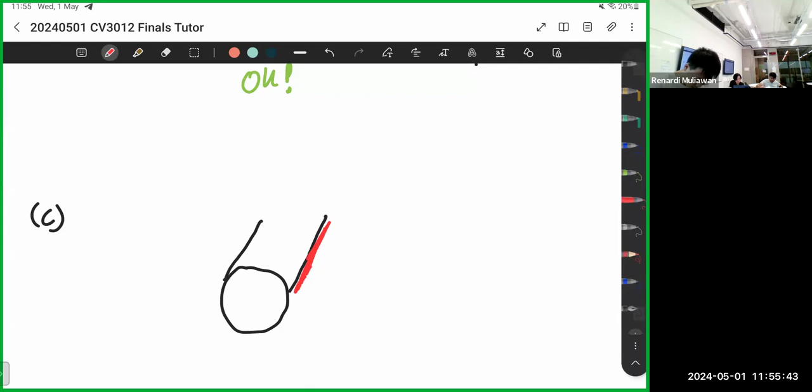So if you draw it in 3D, it looks something like this. Okay, so this is your CHS. There's a weld here, there's a weld here, there's also a weld here. This is your plate.

You don't need to draw in 3D. This one I'm just showing. There's also a weld below. So here, there's a weld below. There's a weld here. There's also a weld below.

Okay, so this one you need to think how many, which part are you welding? This one you must think in 3D. Something like this. In total there are 6 welds.

So there are 2 methods to do this. There's the directional method, there's also the simplified method. Let's start with the directional method first. The directional method.

Okay, the force goes this direction. So we need to identify 2 things: which part is parallel to the force, and which part is perpendicular to the force. The one that is parallel to the force, we use FWLRD. For this one, which is perpendicular to the force, use FWTRD.

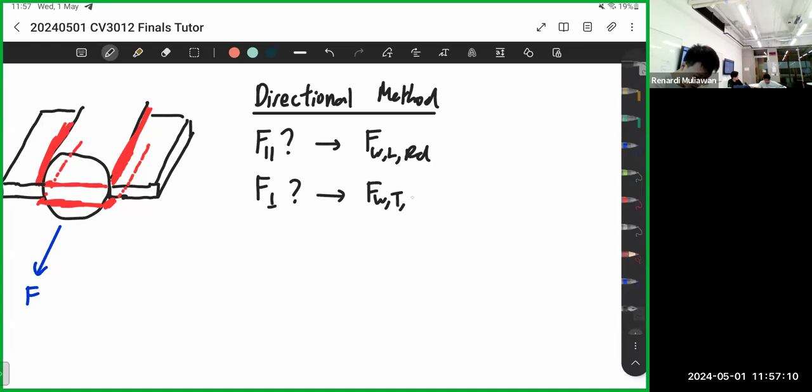So if you look at this image, let me copy this because I will be needing that. For this image, the ones which are perpendicular to the force are these 2 welds, 1, 2. These 2 are perpendicular to the force, so these 2 you use FWTRD. For the remaining 4 welds, 1, 2, 3, 4, you will use FWLRD.

Okay, these values you get from the table, it's much easier. Your fillet welds, I think it's 6 mm, right? You give 6 mm fillet welds. So 6 mm, from the table. S275, 6 mm welds, so you go to your table, find the welds.

Okay, so it's this page. Let me show you. I don't know if you can see that, but yeah, that page, right? So you'll get 6 mm, that's the leg length, this one is the leg length.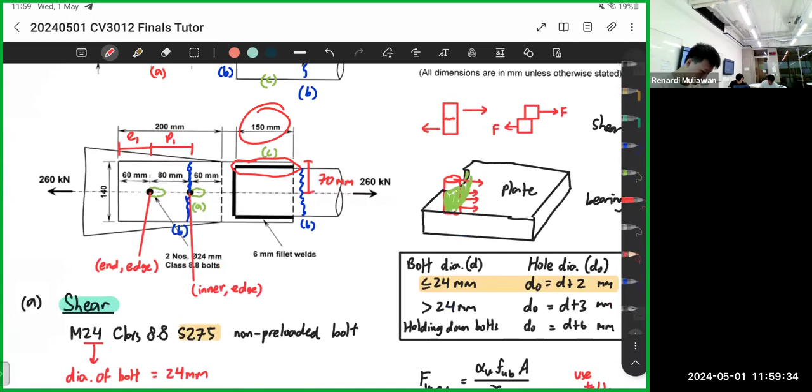So you need to go back to the image. So what's this length? That length is 150, you see the length of the weld is 150. Then this one is 140. So 150, 140, 150, 140. This one is 150, then you have this one is 140 mm.

Okay, so this one again, you need to have good imagery in your 3D, this one's leg length 6 mm. So your total resistance, the sum of weld resistance, is 0.94 times 4 times 150 - these are the red lines - so 0.94 times 4 lines which are 150 in length, plus 1.15 times 2, because there are two blue lines, times 140. That's it, that's your weld resistance in kilonewtons.

So 0.94 times 4 times 150, plus 1.15 times 2 times 140, you get 886. So this one is definitely way bigger than your FRD, which is 260. So this one is okay.

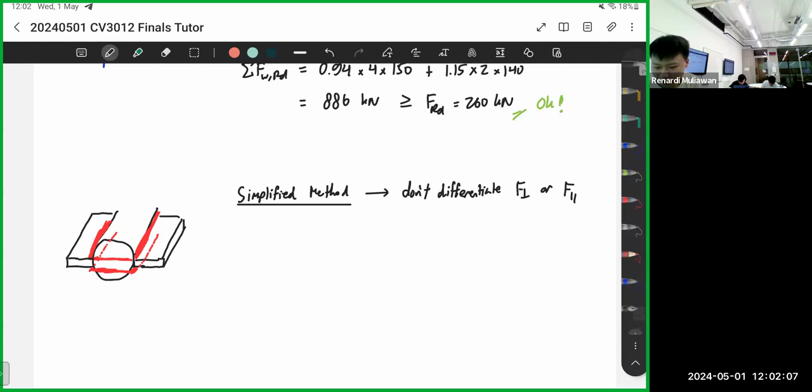So for this one, it's a bit longer, because you need to find it manually. So for this one, you need to find FU first. FU is 430, this one is the property of the plate. Then beta W, beta W is 0.85, this one is for S275.

And then beta W you found, then you find FVWD. The formula is FU divided by square root of 3, then divided by beta W gamma M2. So this one is 430 divided by square root of 3, divided by 0.85 times 1.25. So you will get...

430... you get 234. This one is in newtons per millimeter square. Yeah, so that's FVWD.

Then you multiply it by the throat thickness. So for a 6 millimeters weld, when this is a 6 millimeters weld, this is your weld - 6 millimeters is this length. So this one is what we call the leg length.

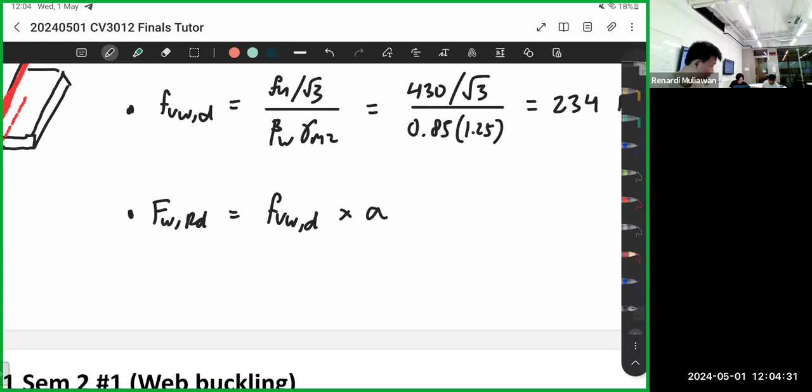Okay, so your FWRD, the weld resistance per millimeters, is your FVWD. So this one is the weld strength multiplied by the throat thickness, so this one is 234 times the throat thickness, which is 6 sine 45 degrees. This one is in newtons, so I'll multiply it by 10 to the -3 to get kilonewtons.

234 times 6 sine 45, then divide by 1000, you'll get 0.99. This one is in kilonewtons per millimeters. So that's your weld strength.

So just multiply, it's the same method as this one. Find the sum of the weld resistance - so the sum of the weld resistance is just your 0.99 multiplied by the total length. Now they don't differentiate whether it's parallel or perpendicular, it's the same.

So it's 4 times 150 - copy and paste. Then you also have 2 times 140, then you just add. So it's just the total length times the weld resistance. You'll get around the same value.

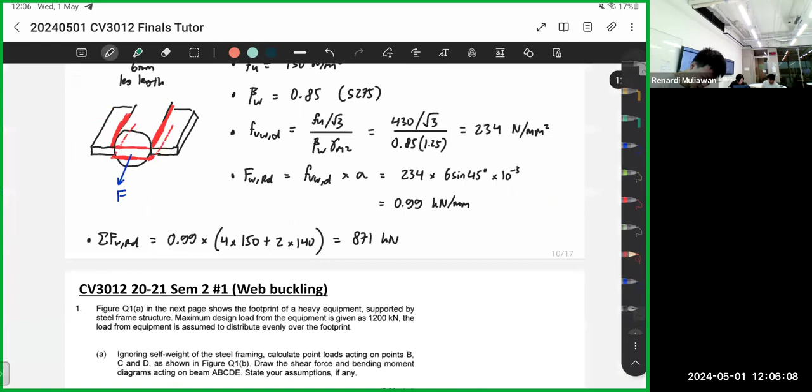871 kilonewton should be similar - 886, 871, around the same. So there are two methods to do it.

And that concludes the session, I think.

Oh, you mean this one, is it? This one, that one - it's not clear here actually. No, because the plate, no, it's not the diameter. If the diameter is like that, the weld should go like this.

Oh, it's on 140 - oh yeah, correct. Correct, oops, so this one is not 140. This one is the diameter, right? So this one is 114 - if I say it's 114.3, correct. Yeah, the weld only goes for 114.

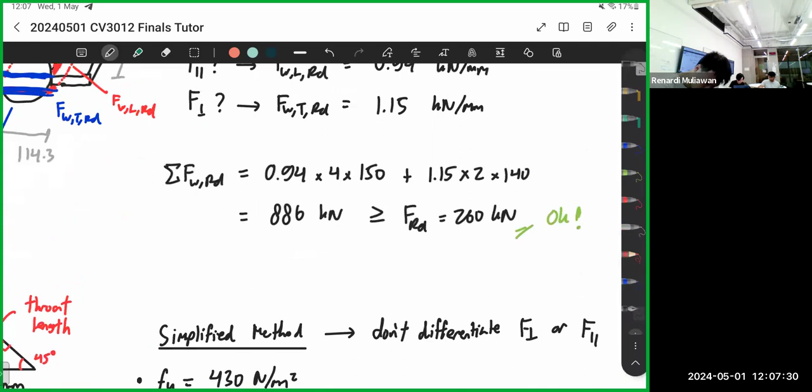Oops, so this one is - oopsies, this one is 114.3. This one is also 114.3. Okay, so this one is a bit wrong now.

Okay, so let's recalculate everything. Okay, thanks for the catch, yeah, I didn't see that.

Okay, that's 827. Then the second one is 820 - very similar to two. There we go. Okay, so that's everything.

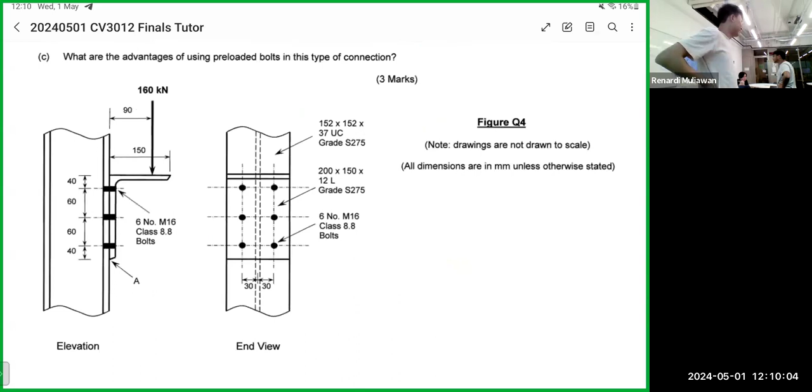Yeah, I don't know if this will come in or it's - the what? No, this one is - that's the question.

Is this so? Yeah, is this in the lecture notes? Can you check? Yes, oh.

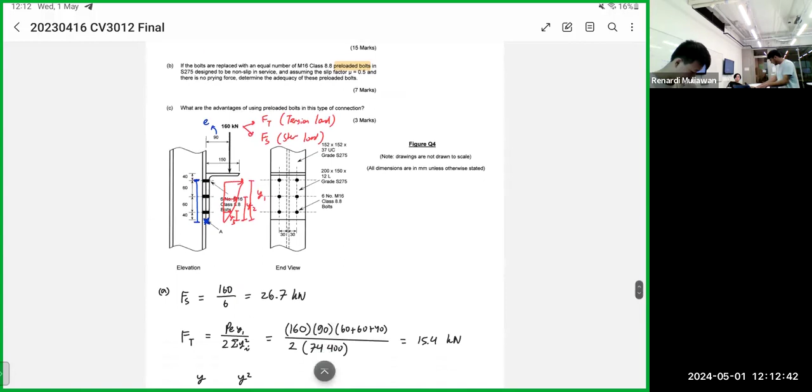Yeah, it's that one. So I think just to give you an idea - for this one, you have 160, right? Then you have 6 bolts. So your shear force, okay...

Shear force per bolt is 160 divided by 6, right? Then you just compare it with your FV RD per bolt. This one is from the table, so you just check the table. That's for shear force.

Then you have the tension. For tension, if you have 160, put here, then you have your eccentricity. So this whole thing will rotate about A. This whole thing will rotate like this.

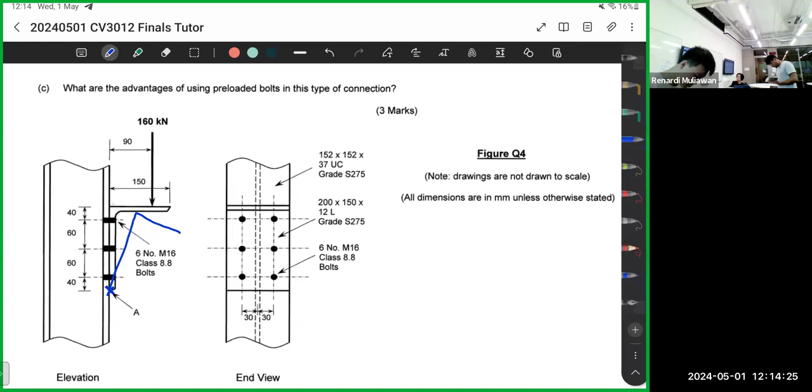Can you imagine that, rotating like that? So if you notice, the topmost bolt gets the most tension. We just need to check the topmost bolt. If the topmost bolt fails, then everything will fail. That's the idea of the check. So that's why they draw it like this.

So bottom bolt will be poked a little bit. This one will be poked more. This one will be poked most. So like this, that's your diagram. It's something like this. Then this is your bottom.

Where's my cheat sheet? Let me see. Here. No question, right? Yeah, but I'm not sure. I'll just teach you.

So the question is, how much is the tension force at the top, because the tension is maximum at the top. This one is Y1, this one is Y2, this one is Y3. It's from the center of rotation to each group. That's y1, y2, y3.

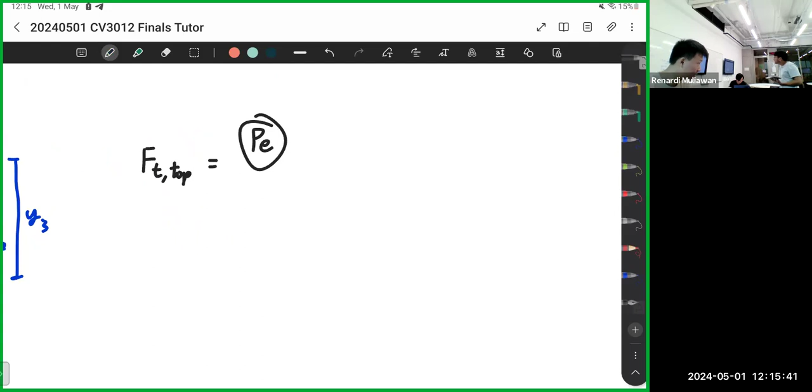So in the formula, the tension force of the top bolt equals P times E, where this is the moment, times y1 divided by 2 times sigma of y i squared.

So P is 160, E is 90, times y1. Y1 is from - sorry, I flipped this - y1 is to the top group. So y1 here is 40 plus 60 plus 60. That's 160. This is 160.

So y1 is 160 divided by 2 times. So you have 160 squared plus y2 - y2 is, sorry, 160. Y2 is 100, then y3 is 40. So 100 squared plus 40 squared. That's your tension force.

So this one you compare it with - what's your book there, let me see - with the tension resistance, FT RD. So you get the value and compare it with your tension resistance. I think this one you can find from the table as well, so you don't need to calculate - find from the table.

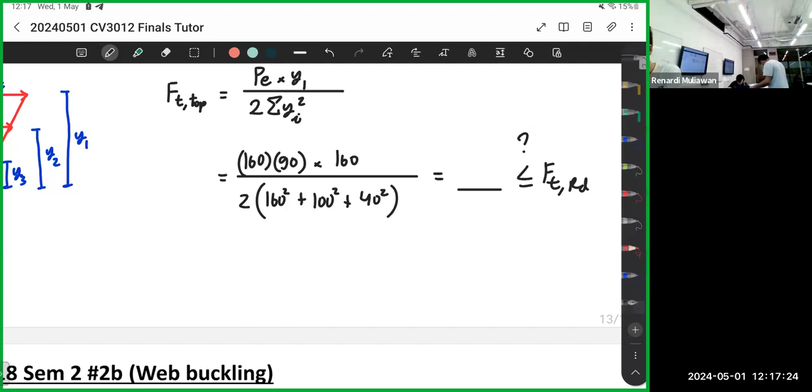So what is this? M16 class 8.8. FTRD is 90.4 kilonewtons. Well, FVRD is 60.3.

So you can actually calculate now. 160 divided by 6 is 26.7. So this one is okay for the shear.

Then for the tension, you will get 31. So it's less than your FTRD, so it's okay. This one just in case they ask now. So this one is also okay, this one is also okay.

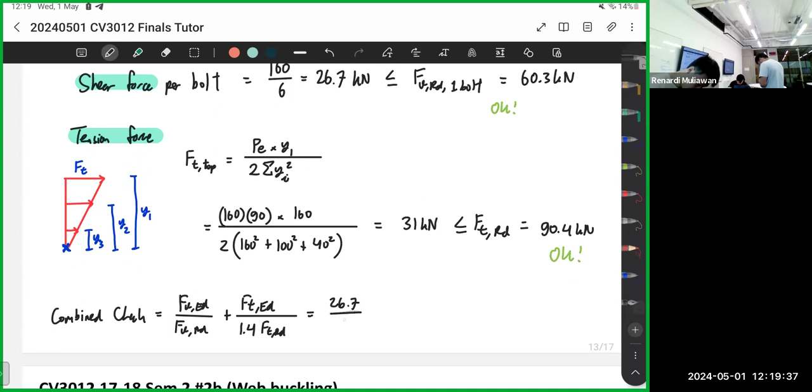Sorry, FTED divided by 1.4 FTRD. So this one is 26.7, 60.3, and we have 31, 1.4 times 90.4. This is definitely less than 1: 26.7 over 60.3 plus 31 over 1.4 times 90.4 gives 0.69, which is less than 1. So this one is also okay.

So that's how you do it. So very fast.

This one is the classic example, it's not this - it's not this. Yeah, so this one is only for... angle lah, but it's different from the angle tension member. It's different. This one is under connection.

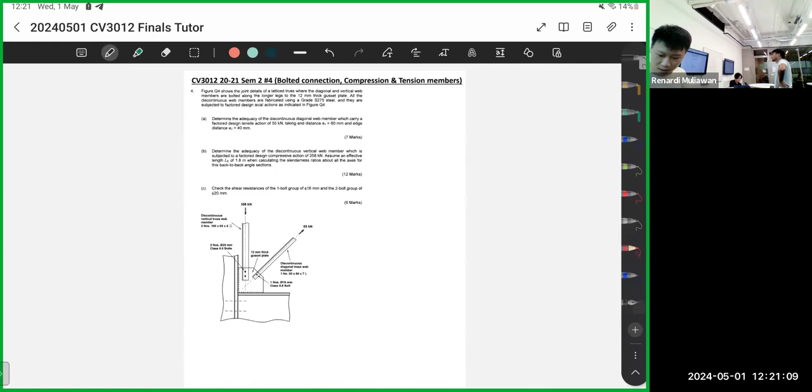This one is part A. So yeah, the tutorial is similar to this one, more similar to this one. This one is 1920, this one is 2021. Yeah, the one I did was 21, 22, I think. Yeah, 21, 22.

What else? This one is I think 21, 22 also. This one was my year. Loyal. Yeah, but yeah. So yeah, I think nothing much.

So anything else? Yeah, I think nothing much. Yeah, so you can try. Okay, yeah.